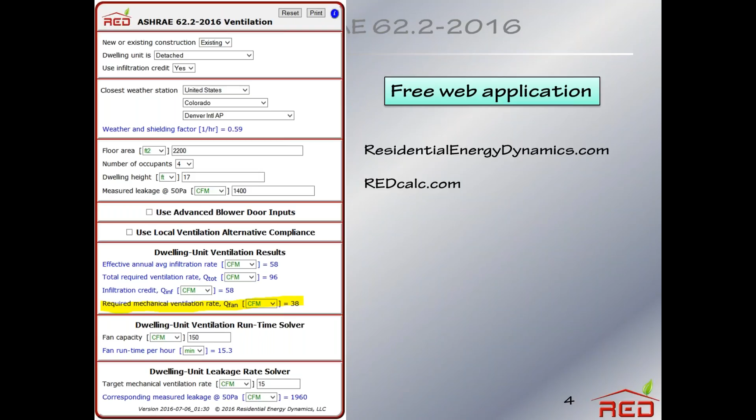I'll look at it live a little later on as we're together. This is available free online, and I know some of you are using this. This is the 2016 version.

It's been up on the website for quite some time for you to try. This is the same thing, although a little bit bigger. I've cut it in two so you can see what it's about here. The highlighted yellow part here is a result. Results are always in blue font, and inputs are in black font. This result is the final result: the required mechanical ventilation, or Q fan, as it's termed in the standard, in this case 38 CFM. Again, we'll look at a live version of this calculation aid a little bit later on.

Rick, we already have one question which I think is very pertinent. It's in terms of the application of the standard. Someone asked, is it in effect? My response to that person was the local authority with jurisdiction decides. Can you elaborate a little more as to whether they can use a different version of the standard, and is it actually the authority with jurisdiction that enforces this?

Thank you to whomever asked that, and thank you, Bill. That's a good question, and Bill's answer is right. It's the authority having jurisdiction that would make that decision.

Many of you working with the DOE-sponsored low-income weatherization program - in that case, it's my opinion that DOE is the authority, so they would decide when you need to start using it. As far as I know, what they've done in the past is by the beginning of your next program year, which for many of you will happen mid this year, you'll probably have to be up and running with the new version, the 2016 version. Up until that time, you may use the 2013 version.

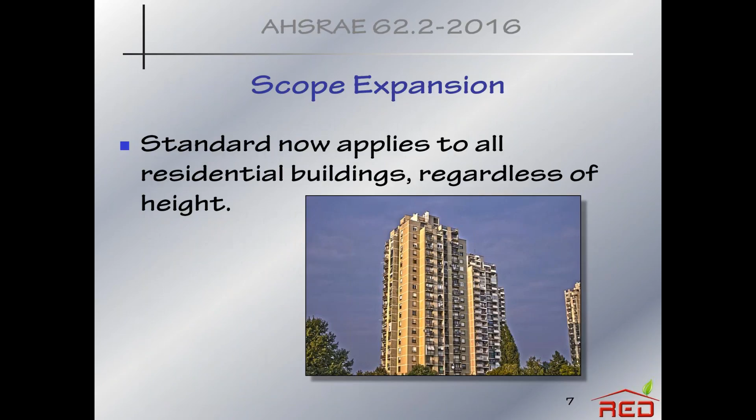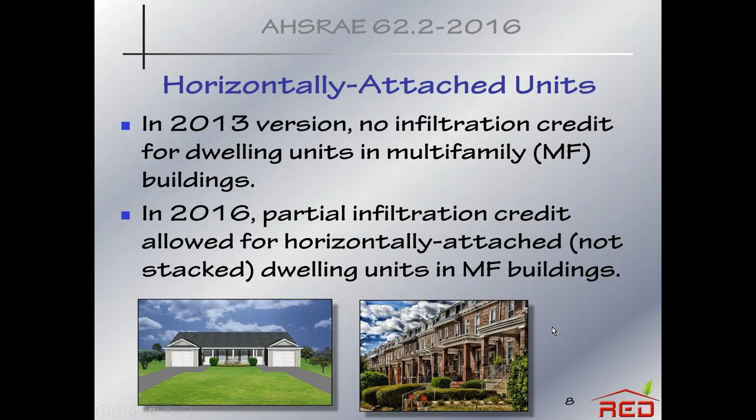On the other hand, if the multifamily dwellings are stacked one above another, there is no infiltration credit allowed. So the only multifamily building allowed any type of infiltration credit - a credit for natural air leakage - is a horizontally attached unit, such as a duplex, triplex, or row houses.

Now this has to do with that credit for horizontally attached buildings. It's based on Q fan, the amount of ventilation we must get mechanically from the fan, and Q tot, which is our target - we'll look at this again. Q fan is equal to Q tot minus the infiltration credit, that is, the amount of air we're getting naturally from the outside.

For horizontally attached units, what we do is derive this A exterior, which is the exterior surface of that particular dwelling unit in a horizontally attached multifamily building, over the total envelope surface. We'll look at an example soon.

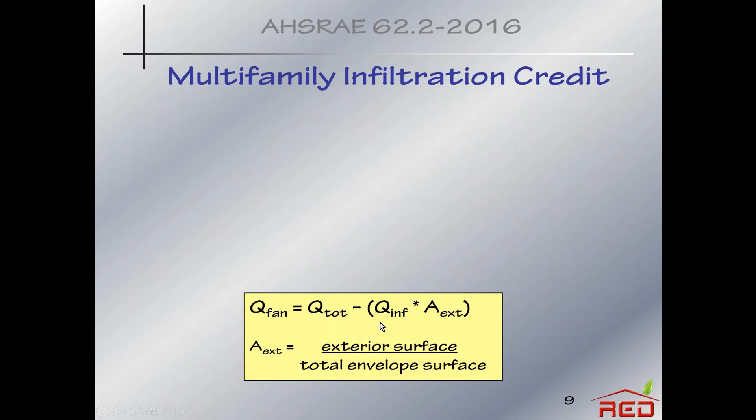So if that is perhaps 80%, this comes out being 80%, meaning we only get 80% of the infiltration credit. If it's a detached dwelling unit, like a single family detached home, A exterior is equal to 1. And if it's a dwelling unit in a stacked multifamily building, there is no infiltration credit allowed at all.

So what you do to take this credit is do a blower door test on the unit in question, say in a duplex. You calculate the fraction of the enclosure area, all 6 sides of it, that is not attached to other units or garages. Again, this is only horizontally attached. Then you multiply the infiltration estimate from the blower door by this fraction, the A exterior, as shown in the yellow box.

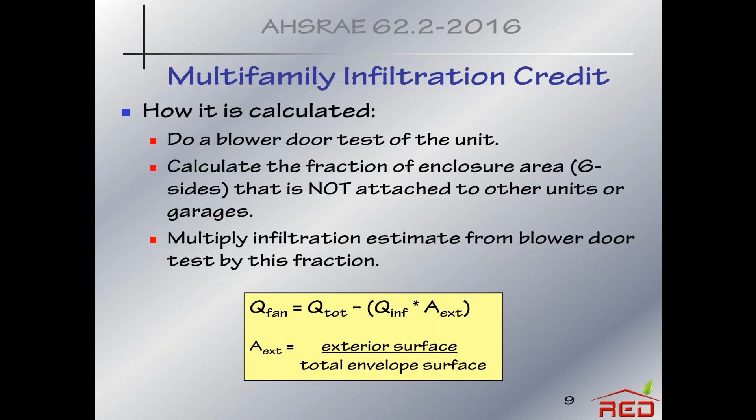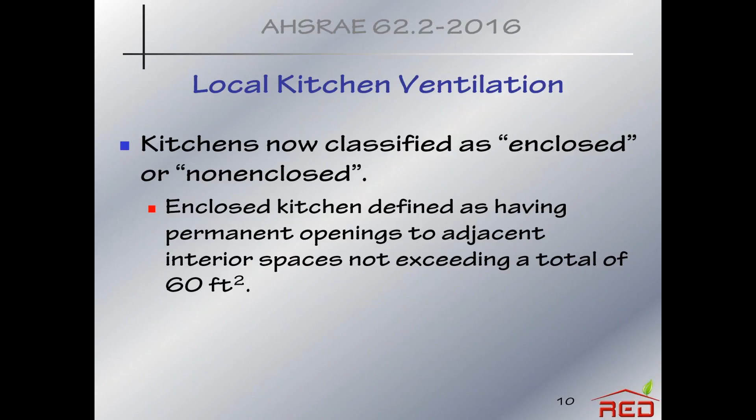Local kitchen ventilation has changed somewhat in the 2016 version of the standard. Kitchens are now classified as enclosed or non-enclosed. An enclosed kitchen is defined as having permanent openings to adjacent interior spaces that do not exceed a total of 60 square feet, approximately 3 doorways. So if it's more than 60 square feet, it's non-enclosed. If it's 60 square feet or less, it's enclosed. Depending on which type it is, we have different requirements.

If the minimum dwelling unit ventilation is 15 CFM, or 7 liters per second, or less, no dwelling unit ventilation is required to be installed. Many of you have been using this de minimis for existing dwellings for almost 2 years now. It was officially released a while ago, but it is now officially in the 2016 version of the standard. This is there for existing dwellings to make things a little easier for you and to bring the costs down.

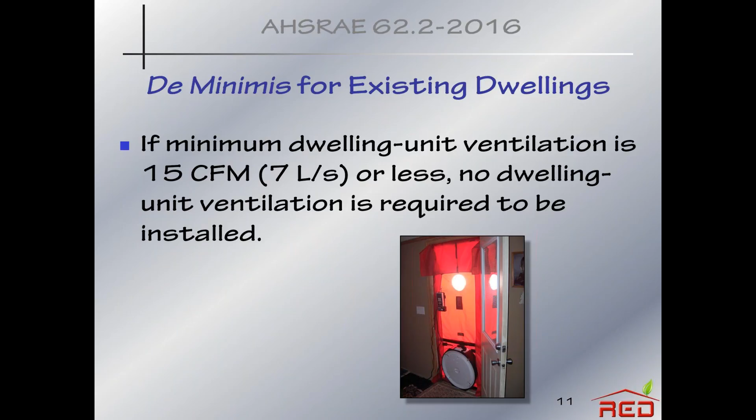Now let's look at local ventilation a little more carefully. The primary purpose for putting exhaust fans in bathrooms and kitchens is to get rid of the worst air quickly. In bathrooms, that's probably very humid air from showering or bathing. In kitchens, where the air is potentially more damaging and more hazardous, it's about getting rid of cooking odors from baking and range-top cooking. Range-top cooking tends to be the most hazardous. Local ventilation must be exhaust ventilation, it cannot be supply ventilation. We want to extract it as quickly as we can.

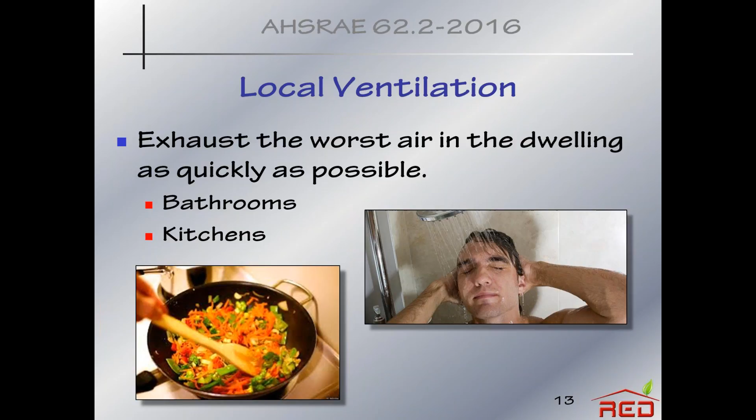Bathrooms have no change from the 2013 version of the standard. If it's demand controlled ventilation, that is, for example, a fan in the ceiling where the occupant walks in and flips a switch, or an occupancy sensor turns it on automatically, that must be at least 50 CFM. If it's continuously operating ventilation, on all the time, it must be at least 20 CFM. So that's exactly the same as it was in the 2013 version of the standard. No changes.

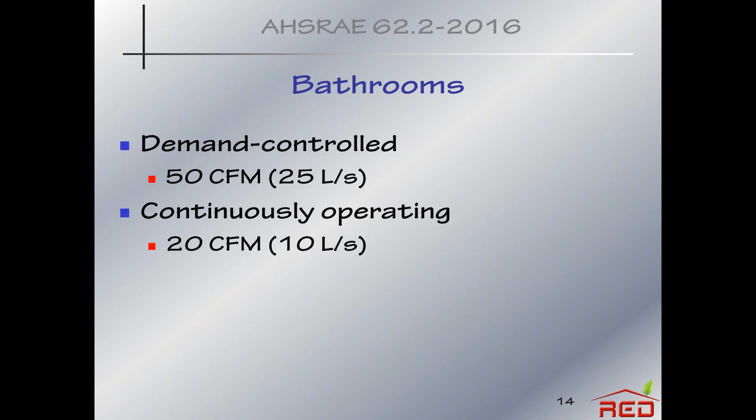Kitchens, on the other hand, are different. For demand controlled ventilation in the kitchen, imagine a range hood over a range that has a switch the person cooking can turn on and off. If it is an enclosed kitchen, remember that's 60 square feet or less to other rooms in the house, the range hood must be 100 CFM minimum. For another fan, this is a change for many of you, if it's a fan on a wall or in a ceiling and you're installing it new, it must be 300 CFM or 5 air changes per hour based on the volume of the kitchen. So that 300 CFM is new.

Remember, if it's a range hood, you put in a new range hood right over the range, it's the same, 100 CFM. But if it's in a wall, you put in a new wall fan, or a new ceiling fan in a kitchen, make sure the fan is rated for a kitchen, it must be 300. The 300 also applies to a downdrafting fan, such as a Jenn-Air. If it's a non-enclosed kitchen, fairly well connected to the rest of the dwelling, the range hood is 100 CFM minimum, and another fan must be 300 CFM minimum if it's in the wall or ceiling. If it's a non-enclosed kitchen, there is no 5 ACH choice, no 5 air changes per hour choice, because then you would have to take the volume of the entire house, and that just doesn't make sense. So this is a fairly significant change with kitchens.

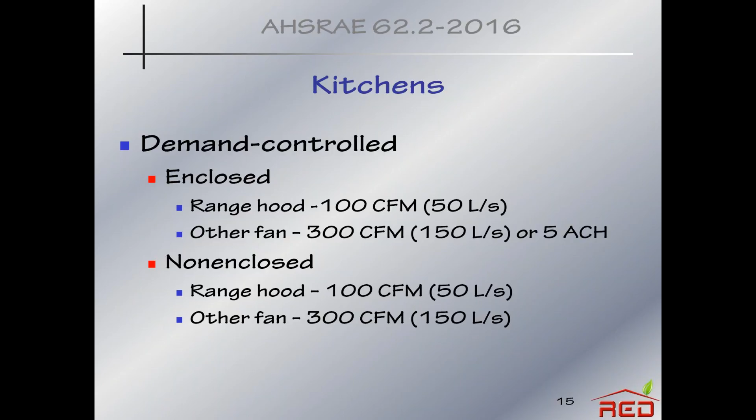There is a detail here: if you're leaving a fan in place, of course, you can leave it as it is. And when you're taking a deficit for the kitchen in an existing home, for the alternative compliance path, which we'll look at briefly at the end of my talk, the highest deficit for a kitchen, no matter what the fan is, is 100 CFM.

Continuously operating fans in an enclosed kitchen require 5 air changes per hour. Continuously operating in a non-enclosed kitchen is not allowed.

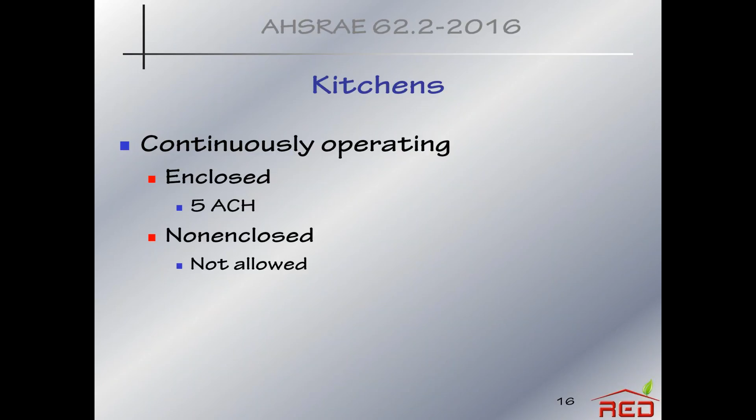Dwelling unit ventilation is intended to dilute the air in the home. In the 2013 version of the standard, this was referred to as whole building ventilation, and previous to that, as whole house ventilation.

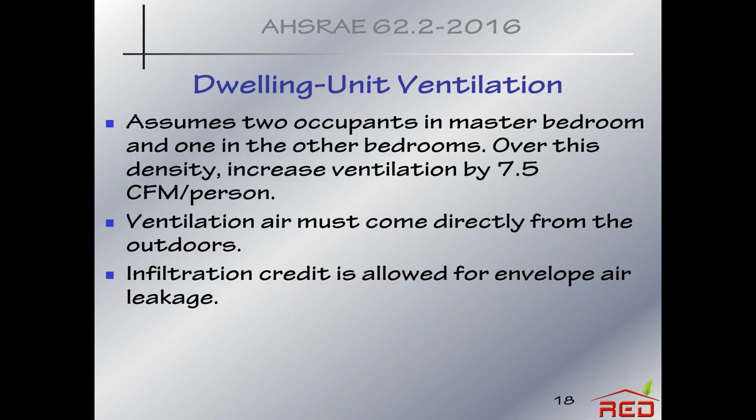Dwelling unit ventilation assumes there are 2 occupants in the master bedroom and 1 in each of the other bedrooms. We'll soon look at the basic equation for what's called Qtot. The ventilation air must come directly from the outdoors, and an infiltration credit is allowed for envelope air leakage, except if it's stacked multifamily.

This is the basic equation from ASHRAE 62.2-2016 for dwelling unit ventilation, Qtot. It is exactly the same as the basic equation in the 2013 version of the standard: 3% of the floor area plus 7.5 CFM times the number of bedrooms plus 1.

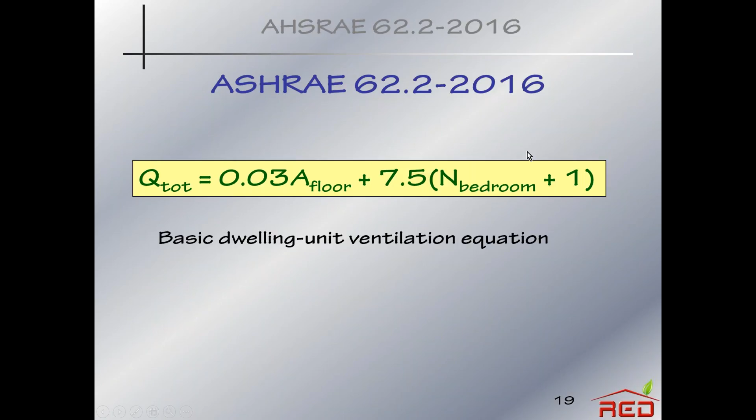The number of bedrooms plus 1 is an attempt to get at the number of people in the house. If you're working on a new house and looking at blueprints, you don't know how many people will live there, but you do know how many bedrooms there are. So you count the bedrooms, assuming 2 people in the master bedroom and 1 in each of the other bedrooms. That's where this comes from.

Dwelling unit ventilation requirements may be satisfied by intermittent ventilation, operating the fan intermittently. Some of you call dwelling unit ventilation, or whole house/whole building ventilation, 'continuous ventilation.' I strongly recommend you stop using the term continuous, because it can be confused with other things, such as continuously operating bathroom ventilation. So call it dwelling unit ventilation.

It may run all the time, or it may run intermittently. An example of intermittent operation: let's say we have a heat recovery ventilator with a capacity of 150 CFM, but we only need 50 CFM. We can operate it 20 minutes on and 40 minutes off every hour, giving us the equivalent of 50 CFM. So that would satisfy things.

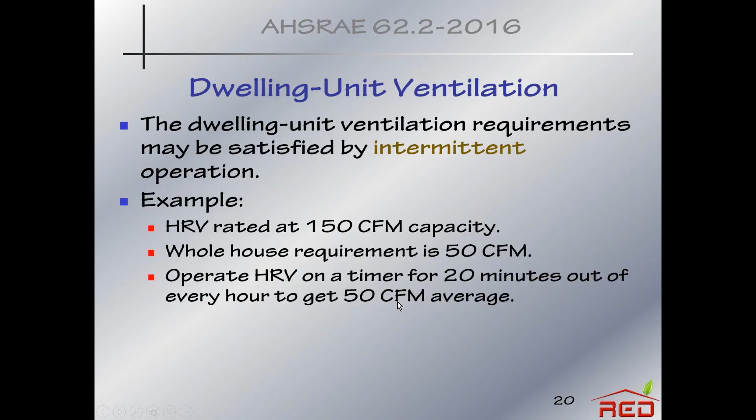The infiltration credit for existing and new buildings is a little bit different, one from the other. This is for existing buildings, dwelling unit ventilation for existing buildings, and the RED calculation aid does all of this for you. Here again is the basic equation in the green bar.

Q-tote is equal to 3% of the floor area plus 7.5 CFM times the number of bedrooms plus 1. That's Q-tote, that's where that comes from, and that is the starting point for our dwelling unit ventilation. This has nothing directly to do with local bathroom and kitchen ventilation.

For existing dwellings, which many of you deal with exclusively, you then add the alternative compliance supplement, which comes from the alternative compliance path. We'll go through that with the RED tool briefly. Then we subtract the infiltration credit, QINF, INF standing for infiltration, and that gives us the required mechanical ventilation rate, or Q fan.

For an existing building, we can take the entire infiltration credit. Remember, however, the limitations for multifamily: if it's horizontally attached, we can only take part of it. And if it's multifamily with stacked dwelling units, there is no infiltration credit allowed for existing buildings or new multifamily.

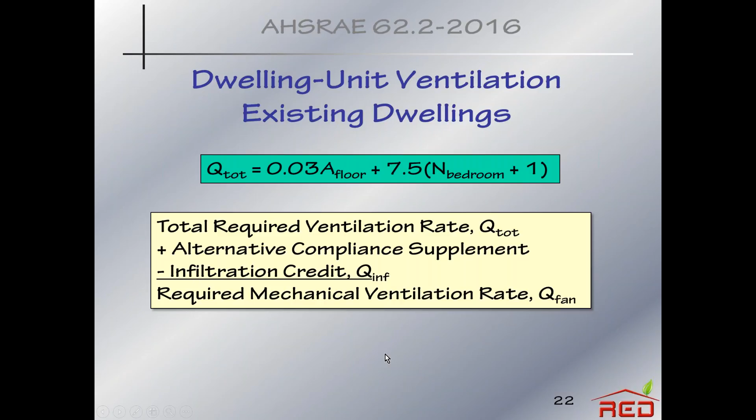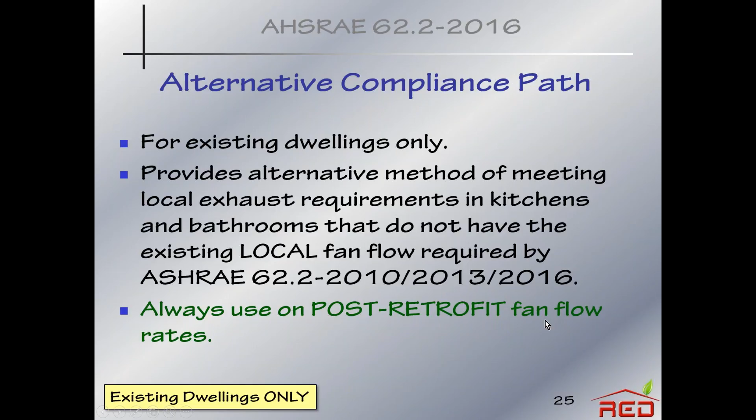This is something that's important in green, this last bullet: always use the post-retrofit fan flow rates that you measure when you put the values in the RED tool or whatever calculation aid you're using. These have to be the ones that are going to remain in place.

So the alternative compliance path, as I explained, each room where local ventilation should be, determine the deficit, which we just looked at. The bathroom is supposed to be 50. If it's less than that, you have a deficit for an existing fan. The kitchen, how much less than 100 is it?

For each room with a deficit, we can reduce the deficit by 20 CFM if that room has an openable window.

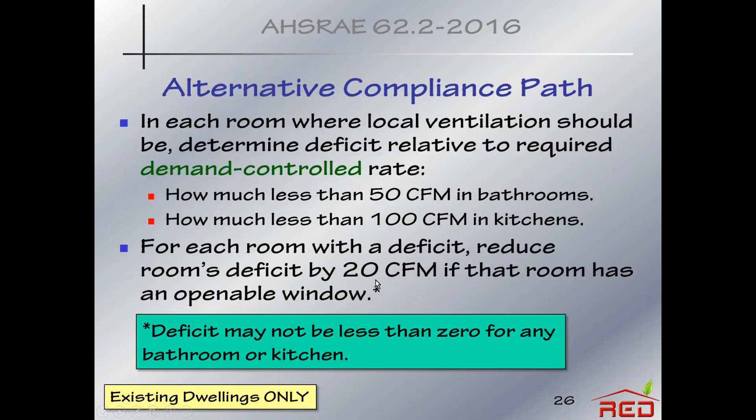The deficits are added up and then divided by 4, as we saw in the RED calculation aid. Then this amount, in the example I showed you, that was 10. That gets added to the required mechanical dwelling unit ventilation rate. And this is available for existing dwellings only.

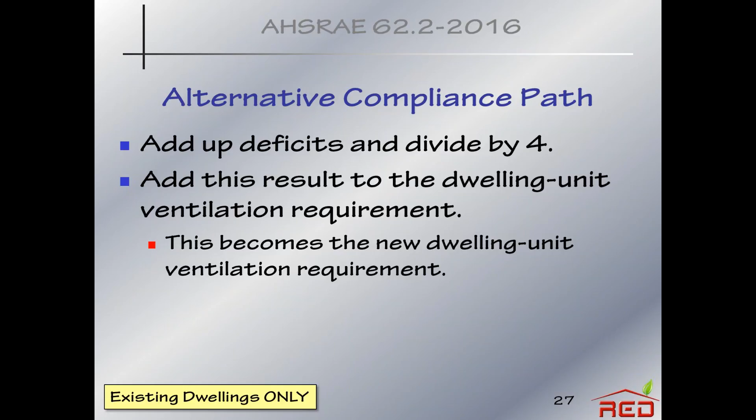If you leave a fan in place in an existing dwelling, in a kitchen or a bathroom, there are no sound requirements. If you put in a new fan, there are sound requirements, but not for one that you leave in place. So, 3 examples for the alternative compliance path.

We divide that by 4, and we have an alternative compliance supplement of 50. So let's say that we started with the required ventilation rate of 45 CFM. We would then add 50 to it to get 95.

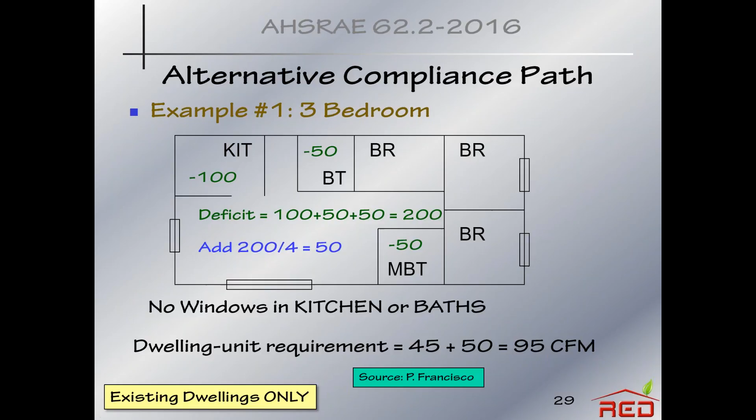So let's take this example and change it slightly. Now let's put a window in the kitchen, a window in this bathroom, and a fan in the master bath. The kitchen has a window that is openable, so we can reduce the deficit by 20, so now we have an 80 deficit.

We put a window in this bathroom, so we can reduce the deficit of 50 by 20, which gives us a deficit of 30. The master bath still doesn't have a window, but now it has an operable fan existing that we measure the flow rate on. We get 32. We subtract 32 from 50, it has a deficit of 18.

We add those up, we get 128. Divide them by 4, we get 32. And that gets added to the initial Qtot value right here of 45.

Last example: now the kitchen's the same, the deficit is still 80, no fan, but an openable window. In this case now we have a deficit of 0 in this bathroom because we're going to put the dwelling unit continuous fan here - we're going to operate this all the time, not intermittently, so that reduces the deficit to 0. And we have the same situation here.

So the total deficit now is 80 plus 0 plus 18 is 98, divided by 4 is about 25. So 45 plus 25 gives us 70.

Bill, any questions? I want to take a break from talking. Hey Rick, it's Jay West. Hi Jay, how you doing?

I've been back here answering some questions under the guise of Bill Spohn. We have some questions that fall along the usual lines people ask. One is about the basement or utility room connected to the house - are these considered part of the usable space or inhabitable space? Is that the term we're using?

Good question, I don't like the question because it's hard to answer, but it's a good question. That comes into play for the floor area, the 3% of the floor area, and one has to decide what the floor area is. Certainly a bedroom is part of the floor area that gets measured, or the living room, the kitchen, but there are other areas that become questionable. A utility room on the floor where most of the living takes place is almost always considered part of the floor area. Where we start to get into real gray areas is with basements.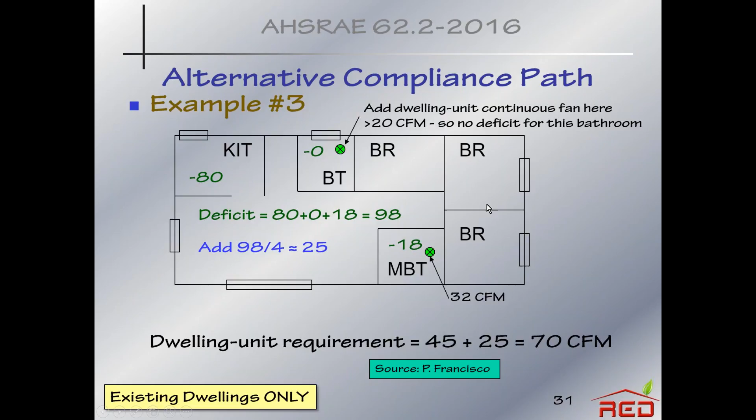And then I assume there was another question about the kitchen being 80, and I just said that's because there's an operable window which deducts 20 from the original 100 CFM needed. Is that correct? That's right. If there's no fan in the kitchen, the deficit is 100, but we are allowed to reduce that deficit by 20 CFM if there is an openable window. So if we reduce a deficit of 100 by 20, that gives us a deficit of 80. That's where that came from.

Back to that original fan - is that a demand-controlled fan, the existing 32 CFM one in the master bath? Do we consider that demand-controlled? In the master bathroom, yes, it's probably best to assume that's a demand-controlled fan, controlled by a switch that the occupant flicks on and off, or controlled by an occupancy sensor.

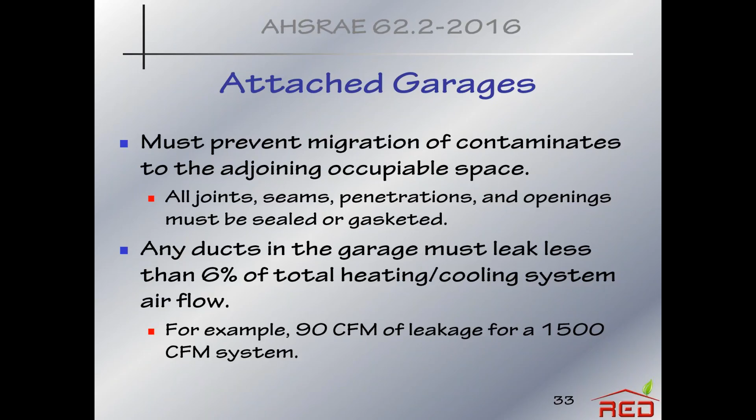Okay, thank you Jay. Some additional provisions of the 2016 standard: attached garages - do your best to prevent migration of contaminants to adjoining occupiable spaces by sealing the joints. The standard says nothing about how to confirm you've done a good job sealing, but informally, a good way to do this is with zone pressure diagnostics. Also, any ducts in the garage must leak less than 6% of the total heating and cooling system airflow. So if there's ductwork or an air handler out there, it's a very good idea to make sure that's tight.

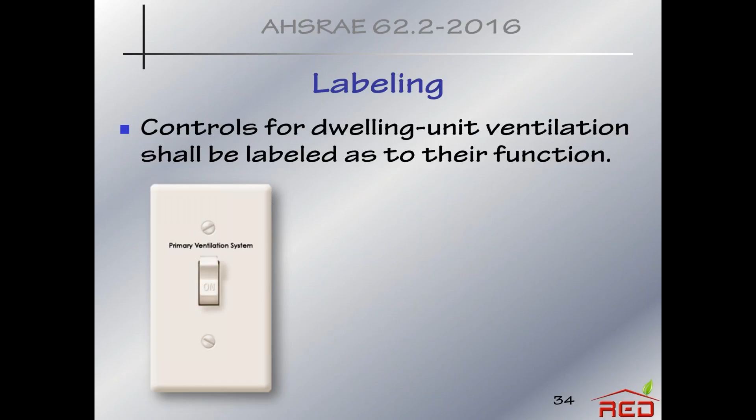Labeling controls for dwelling unit ventilation must be labeled as to their function. So the type on the switchplate says primary ventilation system. There are organizations coming up with some good decals and things you can stick on your control plates to help you out in the field - those should be available fairly soon.

Sound ratings for fans - the first two bullets are for new fans. 1 sone is the maximum for continuously operating fans, or for double duty fans that you install. By double duty, I mean a fan installed in a bathroom that supplies local ventilation and also serves as the dwelling unit ventilation. A fan like that - like a really good Panasonic, Broan, or Air King fan - must operate at 1 sone or less. If it only serves as local ventilation, say a kitchen fan or local bathroom fan, it's 3 sones or less if it's a new fan.

If it's already there, you don't have to worry about the amount of sound it makes - it's not your responsibility if it's already there and you're going to leave it. However, if there's a fan there and it's your decision to replace it, you must comply with these sound requirements. You must put in, if it's a bathroom, a 50 CFM fan, or if it's a kitchen, either a 100 CFM fan for a range hood, or a 300 CFM fan for a downdrafting fan or ceiling/wall fan.

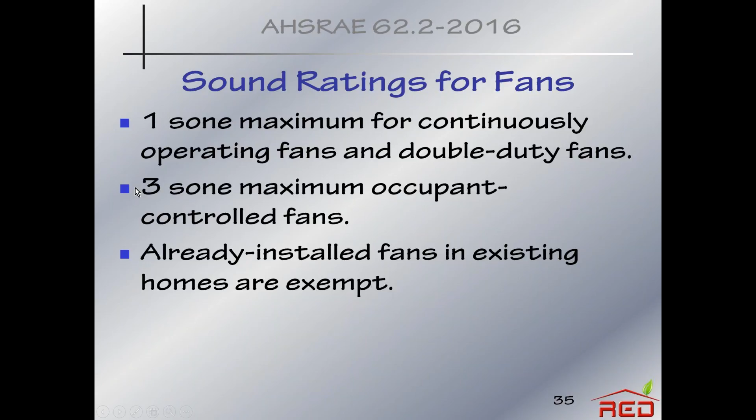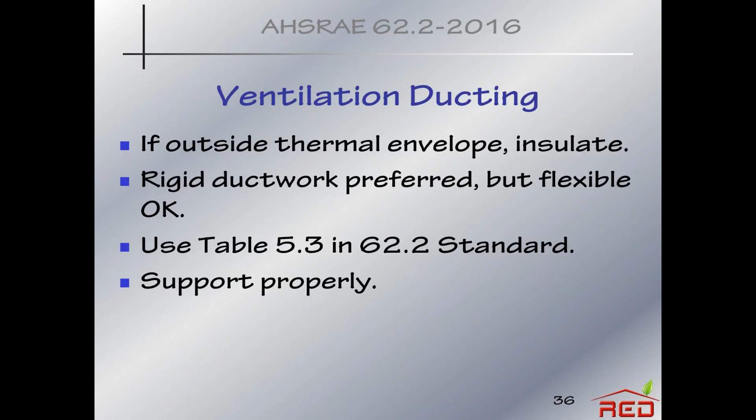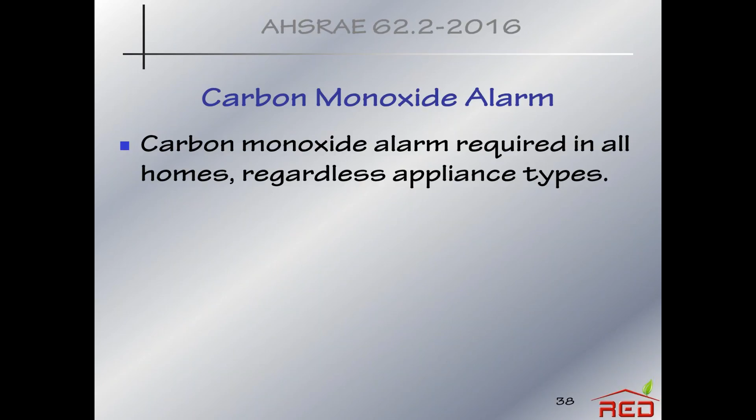Carbon monoxide alarms are required - at least one in every house, by the ASHRAE standard. I think most of your programs are already doing this, so it's not something you need to add.

For resources, I tried to compile some things that might be helpful to you. The Residential Energy Dynamics site, where you can find the calculation aid and some other tools that might help you with ventilation. You can find the ASHRAE standard free online, and I'll show you where to find that. You can also buy the standard - I'm now on the third bullet - I think it's about $60, but my suggestion is you figure out how to see the free one online.

You can't download this, you cannot save it, and you cannot print it, but you can read the whole standard online. It's fairly easy to get to, but you cannot get there directly - I'll show you where you can find out how to get there.

The 62.2 2016 User's Manual is now completed and available for purchase on the ASHRAE website. There is Paul Raymer's Residential Ventilation Handbook, published in 2010, and a related document, Guideline 24 from 2015, which has a lot to say about air quality and contaminants.

I want to bring to your attention a couple of tools that my company, Residential Energy Dynamics, put together. There's an AirCycler application, free online, that helps you calculate the cost of ventilating - both the cost of operating the fans, including a furnace fan if that's part of your ventilation system, and the heating and cooling loss. You'll find it's not all that expensive. Here are some values at the bottom for a sample house. You put in the zip code and the cost of fuel and electricity, and the weather data is all taken care of for you. You can choose from 8 different configurations.

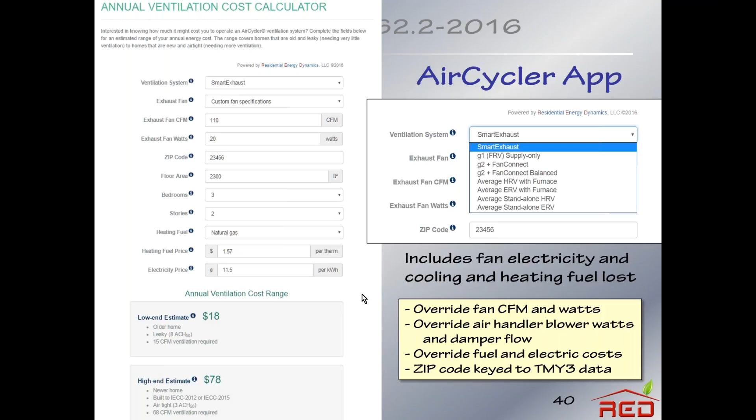Of course, these are keyed to the AirCycler products because they paid for it. There's also one we did for Panasonic, which is quite similar - the choices here, again 8 choices, are keyed for Panasonic products.

And now I'm going to go to the RED tool here. Can you see my screen? Yes, we can.

Okay, good. So this is the home page of the Residential Energy Dynamics website.

I'm showing you this for a couple of reasons. First of all, I mentioned the ASHRAE 62.2, 2013 and 2016, are online free. I'm not going to go through this, but this explains how to get there. So go to the Residential Energy Dynamics homepage. It's explained right here.

And there's also a short video on the RED YouTube channel. For the other two applications I just showed you, the Panasonic one and the AirCycler one, you can find those right here. These are the links you can go to find those. So those are easy to find also.

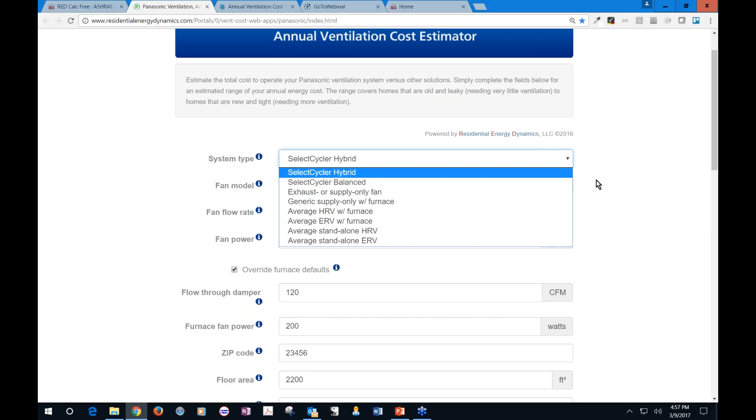This is the Panasonic tool. This is live. You can see its drop-down menus and such. And here is the AirCycler tool.

Now this is the live version of the ASHRAE 62.2 2016 RED tool. It's free. When you go to the page, it doesn't look quite like this. You'll have other things on it, like the navigation menu over here, and there'll often be some ads on, depending upon what page you're on. But I've taken all that off this so it's not as cluttered.

And this is the tool, the calculation aid. It's based on the 2016 standard. There's the whole thing. And I'll just go through this quickly.

All of the labels, the input labels or the result labels, if you click on them or touch them, if you are on a touch device like a tablet or a smartphone, you'll get an explanation of what that particular input requires or what the result includes.

There are drop-down menus here. We have existing or new. My guess is most of you on the call are working on existing homes, so I'll leave it like that, on existing.

Now, I talked about the horizontally attached infiltration credit, and I said that the RED calculation aid helps you through that. This is a new question right here. Dwelling unit is, and then you have two choices. This was not in the 2013 version. This is the way we have taken care of the horizontally attached multifamily building.

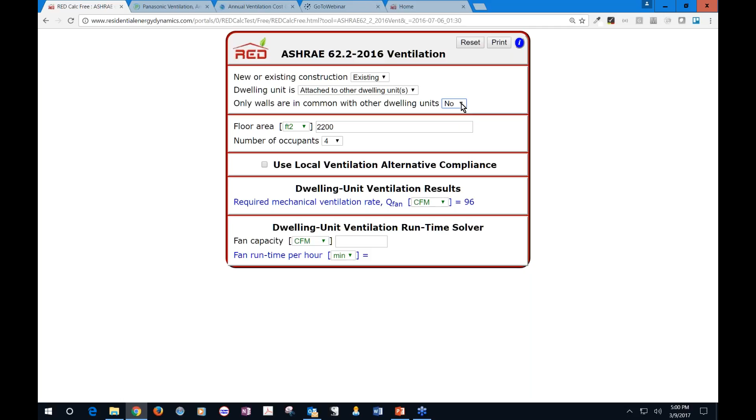So I'll go back to this, and I'm going to go back to detached just to simplify here. This is where you choose the closest weather station. You have US and Canada, and you've got all the states here, of course, and I've chosen Colorado.

There are approximately 1,100 weather stations that are available here. They are exactly the same as in the 2013 version of the standard. Floor area, by the way, you can choose units here. You can change units as you go along, or you can change them globally with the preferences. You can also do math on the fly, calculations within this input box if you want to.

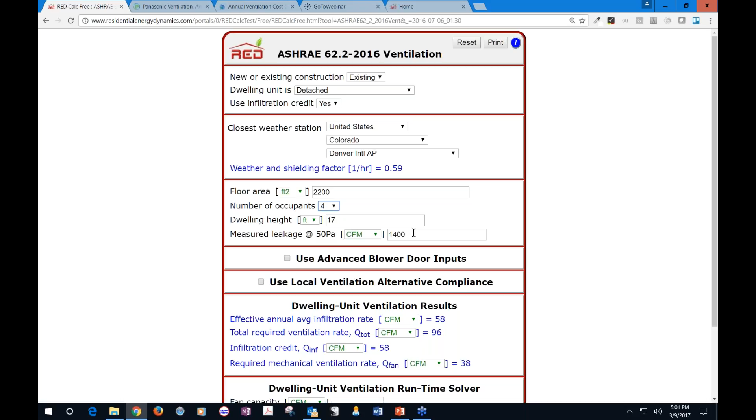Number of occupants, you have a choice of from 1 to 10. I've chosen 4. The dwelling height, and this is the measured CFM 50 of 1400.

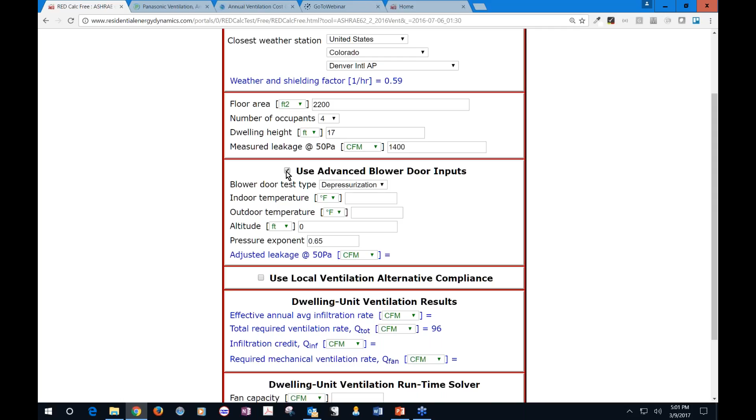There is a section for advanced blower door inputs. If you click on that, it gives you some more options. You can enter altitude if you want to, and you can enter temperature, and that will adjust your answer accordingly. It's a good thing to use if it's really cold outside, really warm outside, or if you're at quite a high altitude. Now I'll close that again.

Use the local ventilation alternative compliance—I'll come back to that. That's for existing homes only. If I click new up here, that goes away.

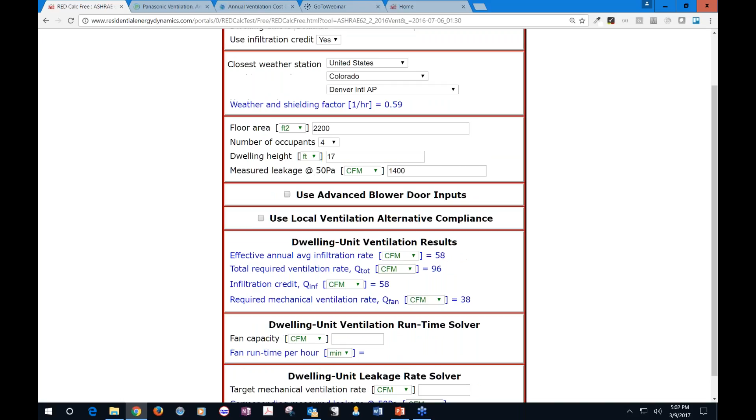Here are the primary results. The effective annual average infiltration rate is 58 for this house. Total required ventilation rate, Q tot, is 96. That's the basic equation we looked at: 3% of the floor area plus 7.5 CFM times the number of bedrooms plus 1. This is the infiltration credit, which comes from the data right here.

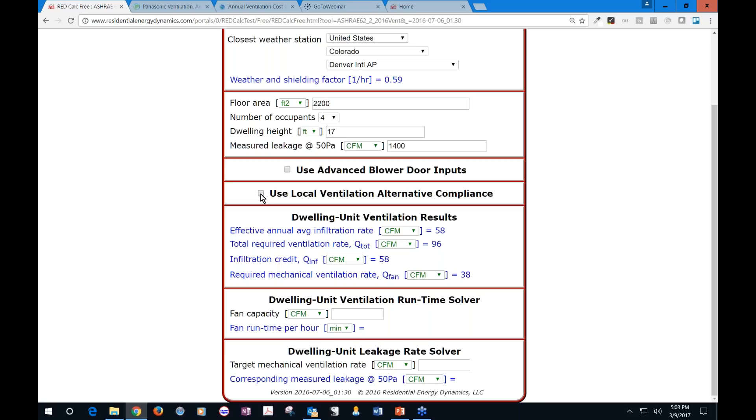And here is the required mechanical ventilation rate, Q fan, of 38. So this 38 does not include the alternative compliance path, but now I'm going to include it. Notice what happens to the 38—it's now gone up to 48 because we've added 10 to it right here. This is the same example we looked at before.

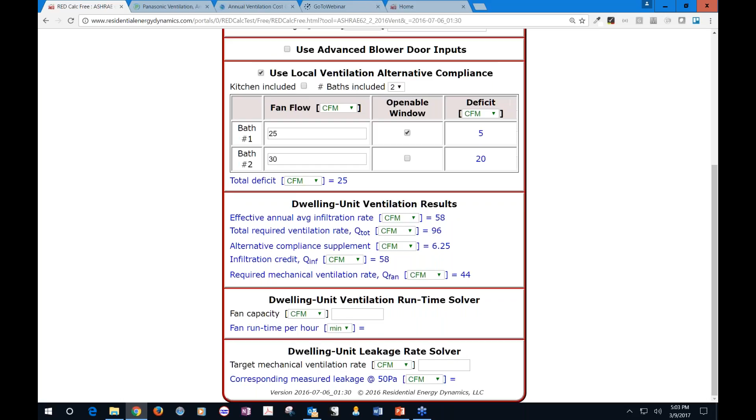So do we want to use the kitchen? You check that to activate the kitchen. You have up to 5 bathrooms—I've chosen 2. The kitchen has an existing fan, 65 CFM, and an openable window, so the deficit is 15. Bathroom 1 has a fan that's 25 CFM, we've measured it, has an openable window, so the deficit is 5. Bathroom 2 is 30 CFM measured, no openable window, so the deficit is 20. The total deficit is 40.

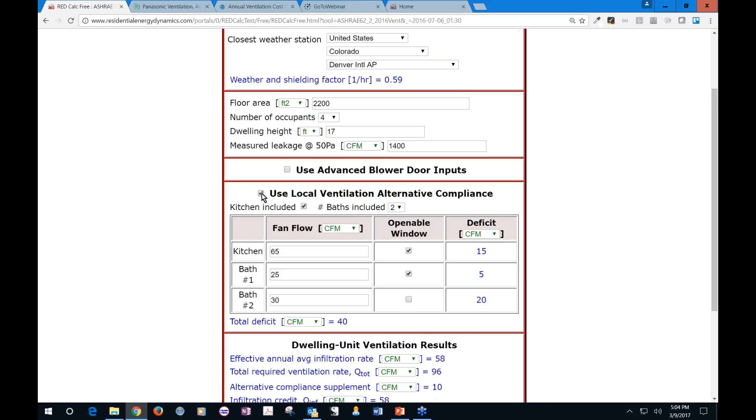Remember, in the simple math, we merely divide that by 4—that's what is done right here. And we add then 10 to get 48. Watch this 48 right here: if I turn off the alternative compliance, this goes back down to 38. If I turn it on again by clicking, all the same values are still there, and it comes into play in the calculation. So we see it's 48. That's taken care of for you.

The horizontally attached is taken care of for you, and there's quite a bit of error catching to help you out here so that you don't make errors.

We need 48. Let's say that the fan you've got in a box on the shelf is 110 capacity. If you put that in there, it tells you how many minutes that has to run every hour at 110 CFM to give you 48, the equivalent of 48 CFM operating all the time. This is for intermittent operation.

And if you're interested in the de minimis, let's say your target ventilation rate is 15. Well, for this particular house, as it's defined here with the height, the CFM 50, the square footage, the alternative compliance part—if you want to know what CFM 50 complies with or corresponds with a 15 CFM fan, put 15 in that box or click outside that box. So a CFM 50 of 1960 would give you a result right here of 15, which means you wouldn't have to put any of it in. Remember, that's the de minimis.

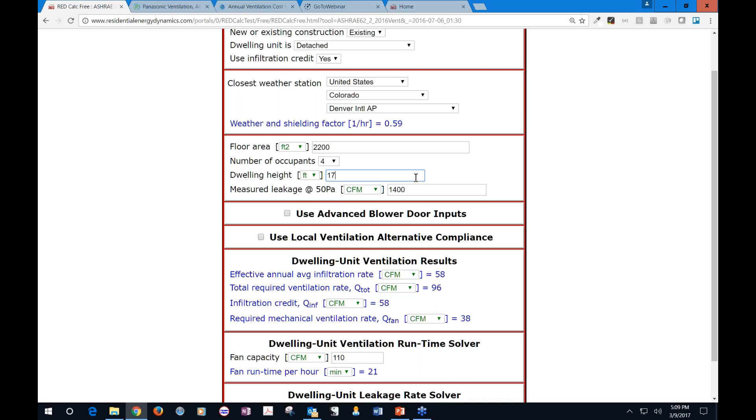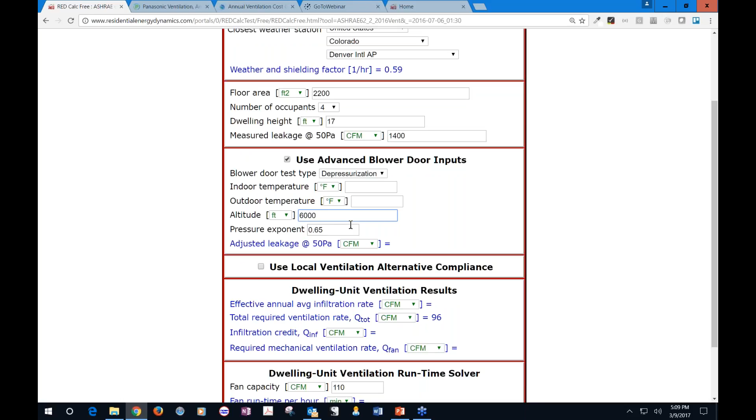Absolutely. So the next one is: is there any altitude adjustment required? There is no altitude adjustment required, but we have given you the opportunity to do that here with advanced blower door inputs. Now some of you, depending on where you're working, say you're in Denver and this house is in Denver, the altitude in Denver is, what is it? Let's say it's 6,000. It's right around there somewhere. Let's see what that does.

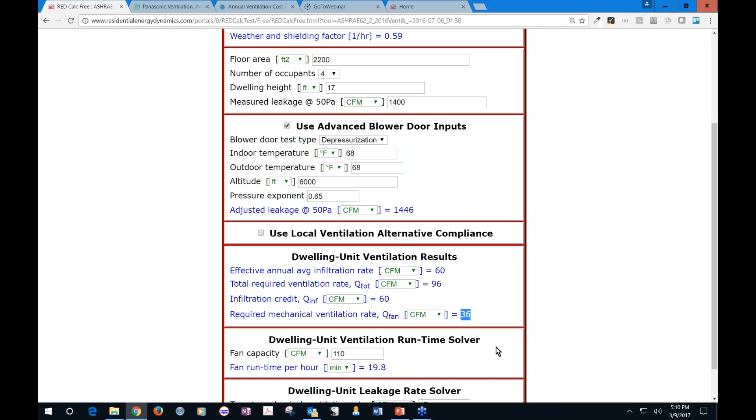And I've got to put some temperatures in here. Those are blank. I have to put some in. So it takes the 1400 CFM 50 and now it's higher. It's 1446. And that has changed, that has lowered our rate here by 2. Now if I unclick this, those numbers are still there, but they're no longer being used in the calculation. So we go back up 2 again.

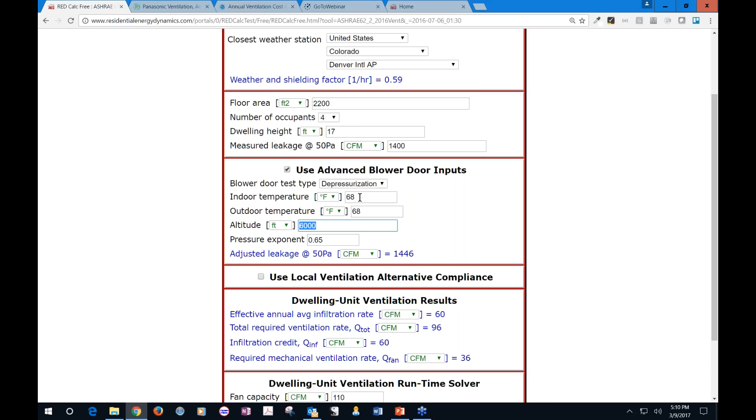So because of entering the altitude, we get a leakier house, and we therefore have a higher infiltration rate right here, so a lower Q fan rate right here. It goes down by 2. And of course the temperature can do the same thing. Altitude merely affects the density of air. That's what this does. And the temperature has an impact on the density of air. So those all affect the CFM 50.

Excellent. So I've got these, these are some great ones. Thank you, Mr. Cruz, for this one. I love this question. All right, ready?

Are garden-style apartments, both stacked and horizontal, eligible for infiltration credit? So the example is you have an eightplex in which 4 units are on the bottom next to each other and 4 units are stacked above. It's a great question. So those are horizontally attached. However, that's not the only attachment. They're also stacked. So none of those are eligible for an infiltration credit.

If a dwelling unit, even if it's 3 floors in height, like a row house, if there's another one above it, so the total floors are 6, but it's one 3-floor dwelling unit above another 3-floor dwelling unit, none of that is due an infiltration credit. Doesn't qualify for infiltration credit. And the garden style apartments as described by the questioner do not qualify.

Now, if there's some offset involved, and say 1 or 2 of those apartments on the first floor do not have dwelling units above, if they are only horizontally attached, then those would qualify for a partial infiltration credit. Just those units, not the others. See, that's a great question.

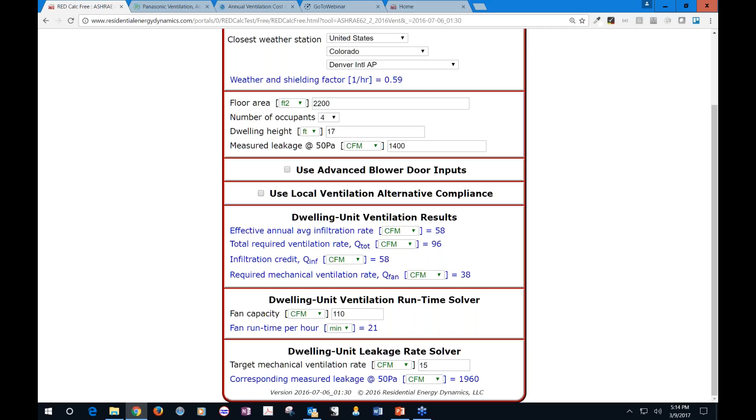Excellent, it looks like we have a few questions about the kitchen. I'm going to give you two of them since they're similar. Why would the kitchen not be included when using the local ventilation alternative? And the other one asks, if you have a fan in the kitchen and bathroom, must you use the local ventilation alternative compliance?

I think those are good questions, and there are a lot of questions usually about the alternative compliance path. A reason you would not use the kitchen, or not even consider it, is if you just turn the kitchen off by clicking. I'm going to unclick it so the kitchen isn't there anymore and doesn't come into play. If you're going to install a new compliant fan in the kitchen as part of your work, there's no reason to include it in the alternative compliance path section of the tool, so you could just shut the kitchen off.

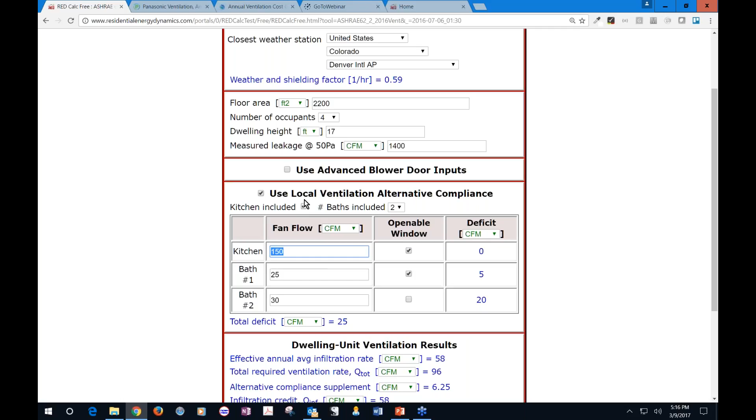But if you want, you can do it like this. So the kitchen, the new fan you put in has a flow rate of 150 CFM. You could put that in there too, and it has an operable window. You get exactly the same thing. The total deficit is 25. Notice there's no deficit for the kitchen because there's a fan that is compliant. So you can either put the data in the input box, as I've done here, or not even consider it at all, and you get exactly the same answer. In both cases, our required ventilation is 44. If I turn the kitchen back on, it's still 44.

So that's a reason. If the fan is already there and it's compliant, if it's 100 CFM or more, or if there's an openable window, it wouldn't even have to be 100 CFM -- say it's 80 -- this makes it compliant and there's no deficit. So in that case, if you know that, you could just not even consider it.

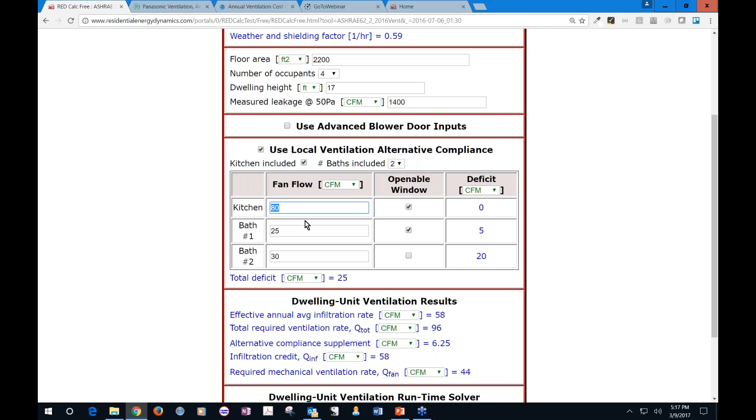Something I like to do when I'm doing a job is put it in and then print this. I've usually got my tablet or iPad, and I take a screenshot of this tool, squeezing it down so it fits on the whole screen. I can send it to the office or print it later. If I include the kitchen, now I know what I had there -- if I put in a 150 CFM fan, I know I did that. Whereas if I turn the kitchen off, I don't have a record of what I did with the kitchen. So I like to do it this way.

I hope that answers the question.

I think so, I have another question. So there's a prequel to this one -- did you know there's somebody else named Cal Steiner besides Cal Steiner? I didn't, because the Cal Steiner we know I thought was retired, but apparently another Cal Steiner is on this webinar and wants to know if the 78 CFM in the kitchen satisfies the 58 CFM requirement. I'm not sure what that means. I'm not so sure this is a new Cal Steiner, I think it might be the same one. He's confusing retired... yeah, what does he mean? He's probably trying to confuse you, mixing up the old Cal Steiner and the new one. Yeah, I don't know what that question means. Okay, we'll just erase it.

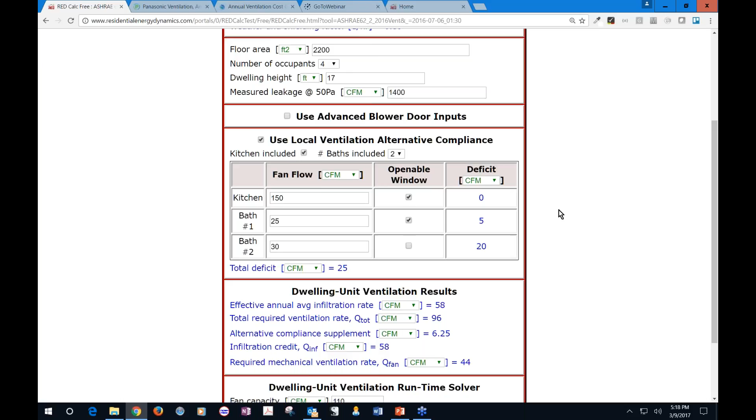Is there a climate zone allowance? Is there a what, Jay? Is there a climate zone allowance?

No, all of that is gone. I'm going back -- the climate zones, the shielding factors, way back to the four climate zones, that all disappeared with ASHRAE 62 1989, and 62.2 has never been that way. We have much more accurate weather data now, a much better way with these weather stations. We've got 1,100 weather stations rather than just 4 climate zones, and it's all based on something called TMY3 weather data -- typical meteorological year data, the third iteration of that, and it's considered to be quite accurate.

Do not use it in the same way you would use heating degree days. It's not compiled data as heating degree days or cooling degree days are. This is typical data. It doesn't change from year to year, whereas heating degree days and cooling degree days do. So no, there's no climate zone adjustment.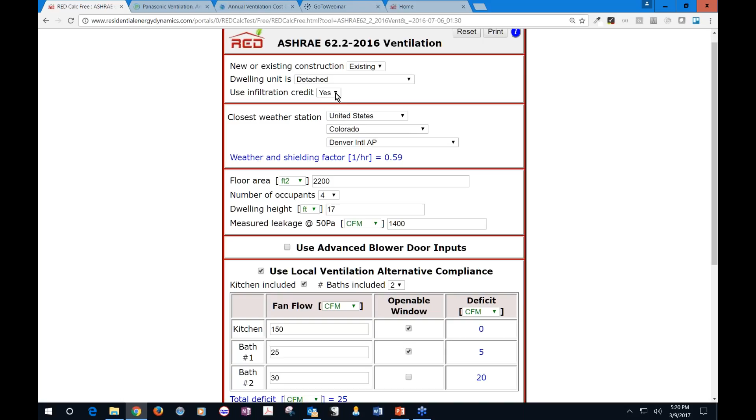It's all taken care of when you choose the appropriate weather station. And of course, if you decide not to use the infiltration credit, watch what happens. If I click no, a great deal of the inputs disappear. The height, the CFM 50, so much of it is there to calculate the infiltration rate, including the climate. That's the only thing we need the climate for, is to calculate the infiltration rate, as well as the height and the leakage rate and some other things.

All right, so looks like we've got— I think it'd be a good time to move on here. We're getting a lot of follow-up questions from some of the first questions that were asked, and I think we've still got some stuff to cover, right? So, no, I'll hand it back. No? No, no. Okay, great. Well then, let's, if you got it, so I'll...

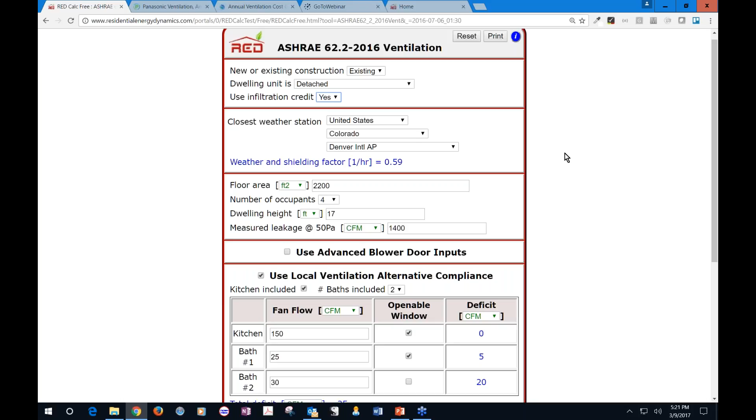Do we consider those when entering occupants? Do we have a standard for cats, dogs, fish tanks, smokers, etc.? No, we have none of that. It's a fair question, especially big dogs, and I suggest that the analyst, when in the field, use their best judgment. Generally speaking, we're after people, but there are dogs that we would count like a 40-pound little boy, wouldn't we, as an occupant, and we might have a dog that weighs 100 pounds. So what do you do? Generally speaking, the ASHRAE standard doesn't get into that, doesn't get into pets or aquariums or smokers. So it doesn't deal with it. It's beyond the scope of the standard. So I really can't answer that. Use your best judgment, that's about all I can say.

Excellent. So we did have a question about multifamily examples. What are your thoughts about that? An example of how you would basically use this tool on a detached single-family home the same as you would on a horizontally connected row house?

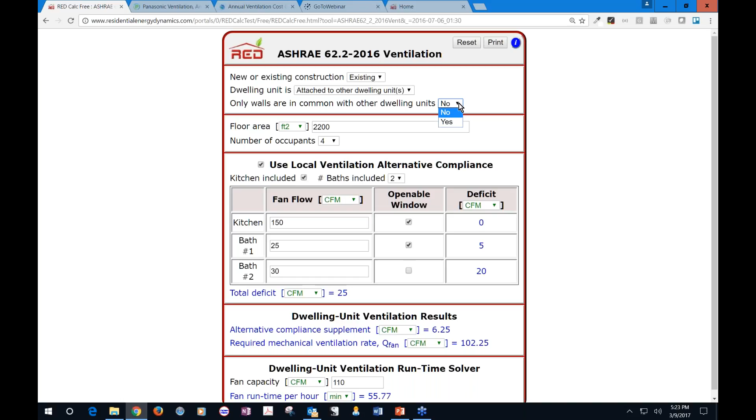So let's go back to yes. The part of the tool that just appeared is right here, if you can see my pointer. Area—let's say this is a duplex, we're interested in a duplex. Area of common walls, one wall in common with another, we'll say that's 400, as I've entered here.

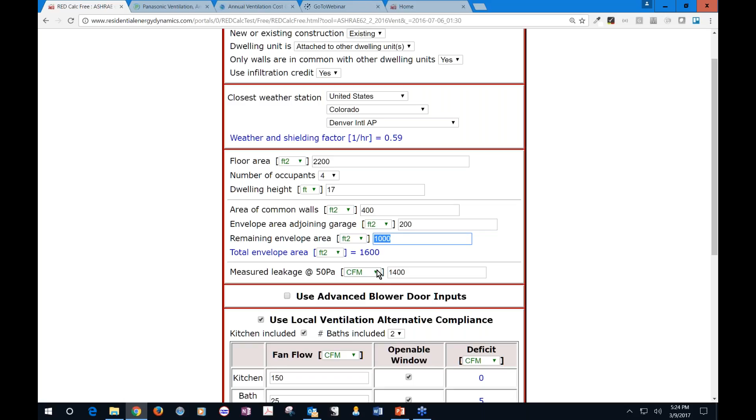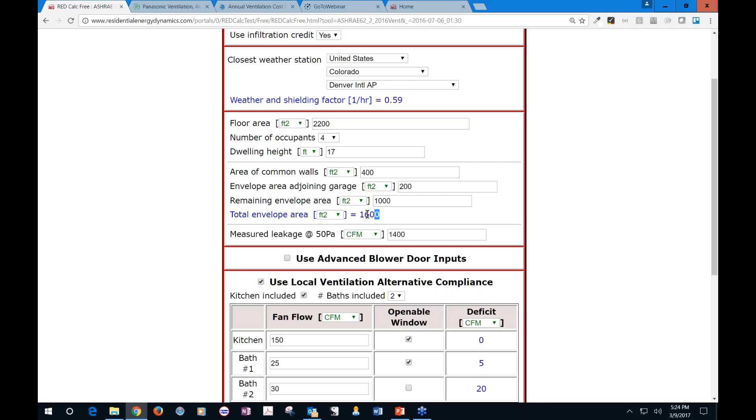Envelope area adjoining a garage, we'll say that's 200. Garages are included here in the horizontally attached section. Remaining envelope area, 1,000. And again, if you click here or touch it, it explains what these inputs are to be. So this gives us the total envelope area, 400 plus 200 plus 1,000, and this includes the floor and ceiling also, even though those may not be attached to another dwelling unit—1,600—and we have the numbers here with which to adjust the infiltration credit accordingly.

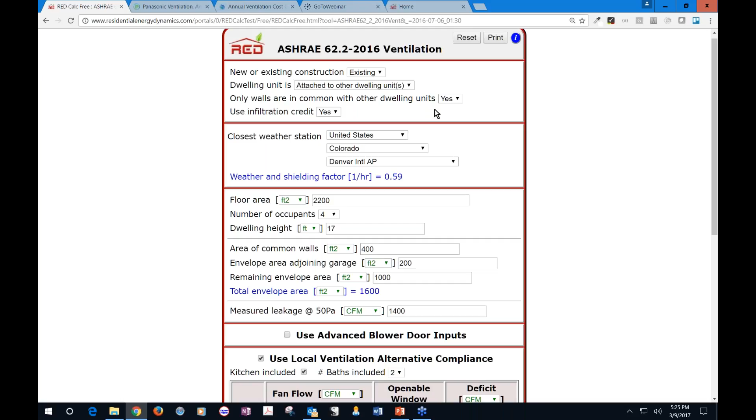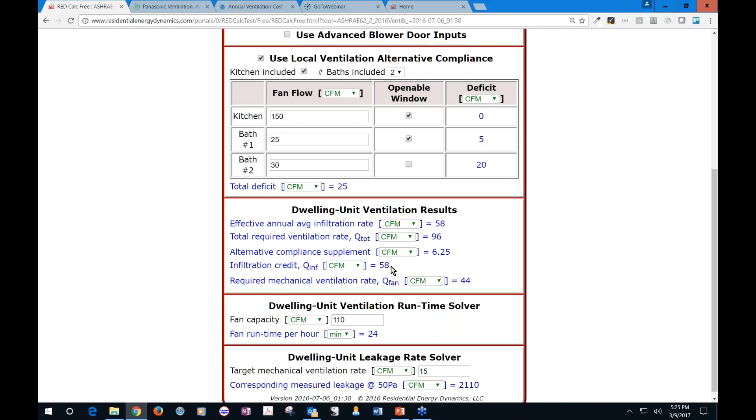So here we have an infiltration credit of 36. Now keep that in mind. Let's go back and say now that this is not attached to another dwelling unit, let's say it's detached. Now the infiltration goes up to 58. So you can see if it is attached horizontally only, we are allowed to take a partial infiltration credit. And you can see 58 is the full amount, and if I make these attached again, the partial is 36. So the required mechanical ventilation rate, Q fan, goes up to 66. Well, that's a quick example of horizontally attached multifamily.

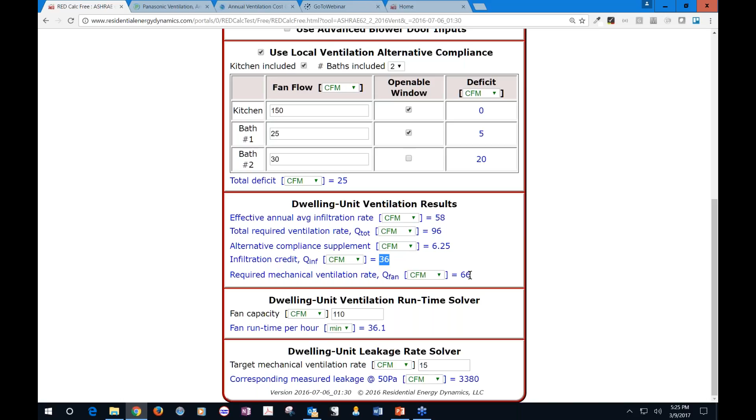Awesome. That helps a lot.

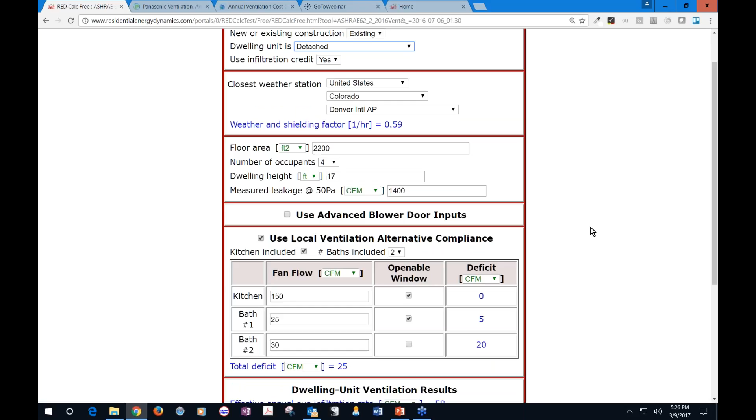Okay, so either the same Cal Steiner or a different one wants to take a second shot at this question. Sorry, we had some wrong numbers from a small phone keyboard. If an existing fan's CFM is greater than the required CFM after all inputs, does that satisfy ASHRAE if we label it?

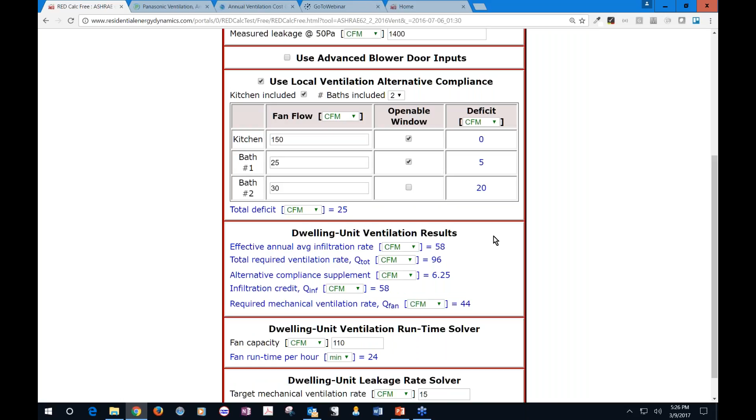The ASHRAE standard is a minimum standard. So if it states, for example, that the dwelling unit ventilation should be 44, that's a minimum ventilation rate. If you want to install 60, you are in compliance. If you want to install 45, or 44, you're in compliance. But if you install 42, you are not in compliance with the standard. I hope that answers Cal's question.

It definitely satisfied me. Good. Well, he's a very difficult man to satisfy. That's the truth. Yeah, that's why, and I don't want to cast aspersions at his taste in football, since that's our joke of the day.

However, we just got so many questions, I think they can just keep going and going. Tell me when we're getting close. Are we doing about 3 more minutes of this? What do you think? Yes.

So, just to clarify, for an enclosed kitchen with another fan, is the 5 ACH for the kitchen volume only? Good question. Yes, if it's an enclosed kitchen, 5 ACH running all the time as a local fan is allowed, and the 5 ACH is based upon the enclosed kitchen volume. Remember, enclosed is determined by 60 or fewer square feet of area of attachment to other parts of the house. If it's a non-enclosed kitchen, the 5 ACH is not an allowed way to supply local ventilation. It would have to be demand-controlled ventilation.